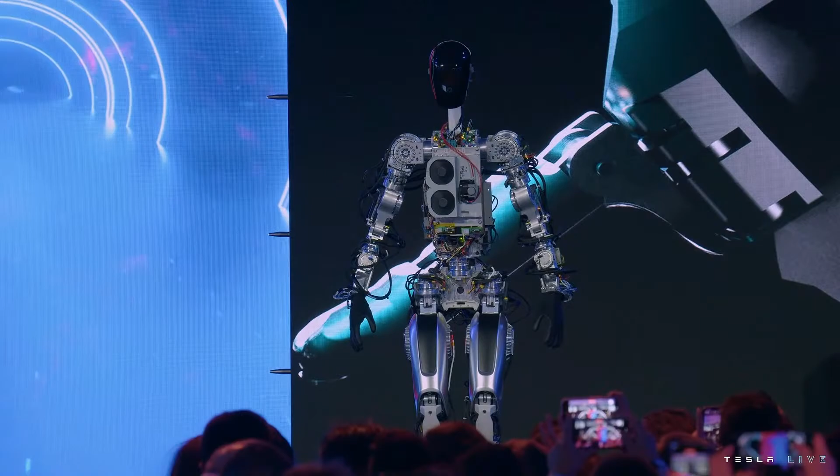So this is essentially the same full self-driving computer that runs in your Tesla cars, by the way. This is literally the first time the robot has operated without a tether. It was on stage tonight.

So the robot can actually do a lot more than we just showed you. We just didn't want it to fall on its face. So we'll show you some videos now of the robot doing a bunch of other things, which are less risky. We should close the screen, guys.

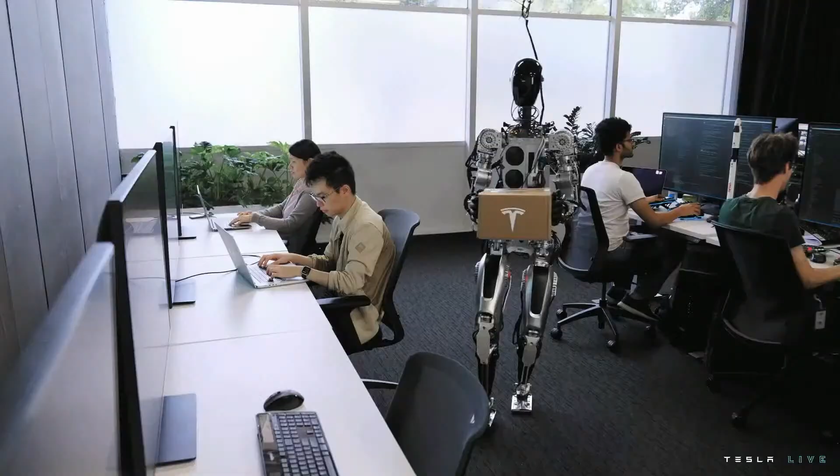Yeah, we wanted to show a little bit more what we've done over the past few months with the bot, just walking around and dancing on stage. Just humble beginnings, but you can see the autopilot neural networks running as is, just retrained for the bot, directly on that new platform. That's my watering can.

Yeah, when you see a rendered view, that's the robot. That's the world the robot sees. So it's very clearly identifying objects. Like this is the object it should be picking it up.

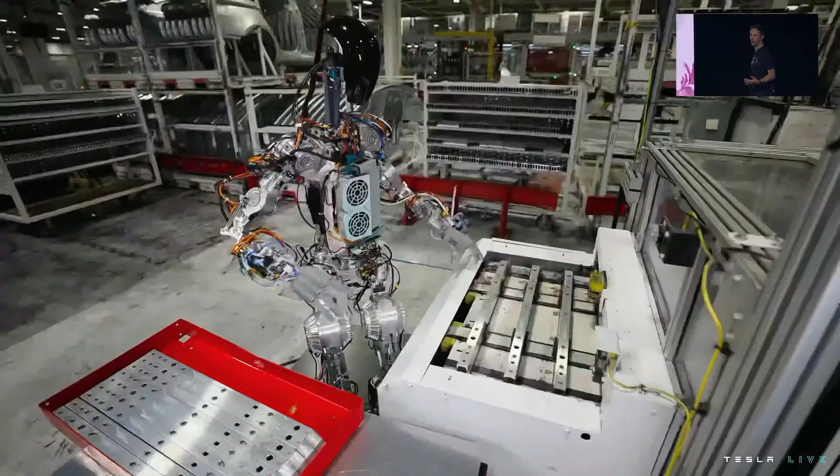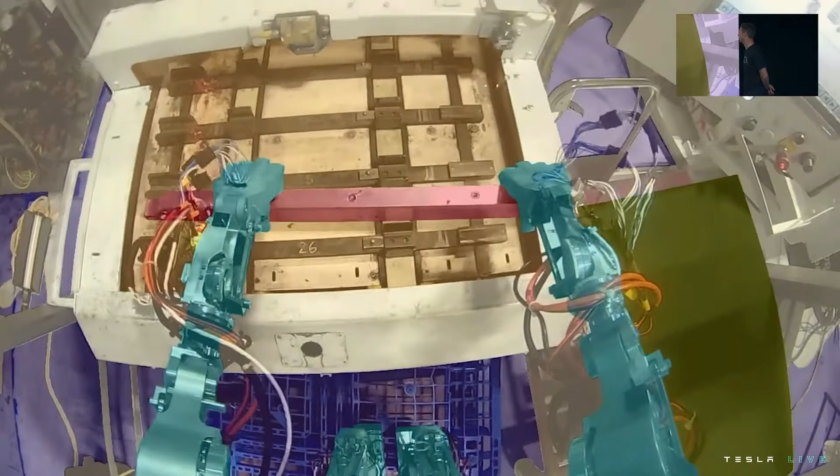We use the same process as we did for Autopilot to collect data and train neural networks that we then deploy on the robot. That's an example that illustrates the upper body a little bit more. And something that we'll try to nail down to perfection over the next few months. This is really an actual station in the Fremont factory that it's working at.

And that's not the only thing we have to show today, right? Yeah, absolutely. So what you saw was what we call Bumble C, that's our sort of rough development robot using semi-off-the-shelf actuators. But we actually have gone a step further than that already. The team's done an incredible job, and we actually have an Optimus bot with fully Tesla-designed and built actuators, battery pack, control system, everything.

It wasn't quite ready to walk, but I think it will walk in a few weeks. But we wanted to show you the robot, something that's actually fairly close to what will go into production, and show you all the things it can do. So let's bring it out. Do it.

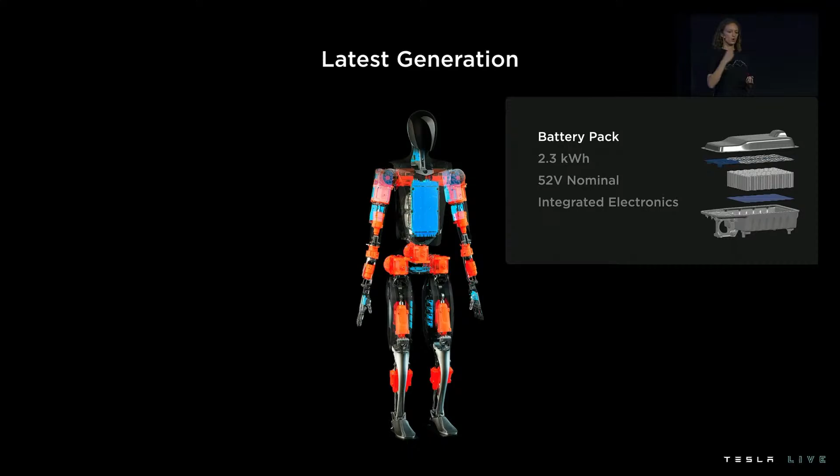This is sized at 2.3 kilowatt hours, perfect for about a full day's worth of work. What's really unique about this battery pack is it has all of the battery electronics integrated into a single PCB within the pack, so everything from sensing to fusing, charge management, and power distribution is all in one place. We're leveraging both our vehicle products and energy products to roll key features into this battery - streamlined manufacturing, efficient cooling, battery management, and safety. And of course, we can leverage Tesla's existing infrastructure and supply chain to make it.

Going on to sort of our brain, it's not in the head, but it's pretty close - also in our torso, we have our central computer. As you know, Tesla already ships full self-driving computers in every vehicle we produce. We want to leverage both the autopilot hardware and software for the humanoid platform, but because it's different in requirements and form factor, we're going to change a few things first.

It's going to do everything a human brain does - processing vision data, making split-second decisions based on multiple sensory inputs, and also communications. To support communications, it's equipped with wireless connectivity as well as audio support. It also has hardware-level security features, which are important to protect both the robot and the people around it.

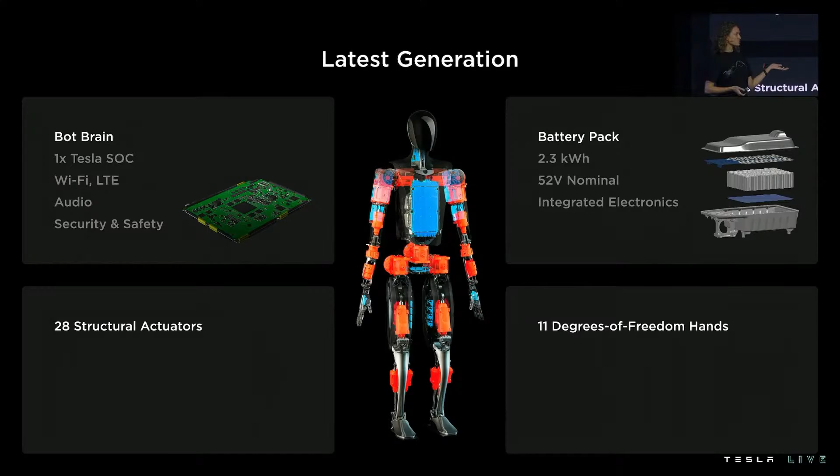Now that we have our core, we're going to need some limbs on this guy. We'd love to show you a little bit about our actuators and our fully functional hands as well. But before we do that, I'd like to introduce Malcolm, who's going to speak a little bit about our structural foundation for the robot.

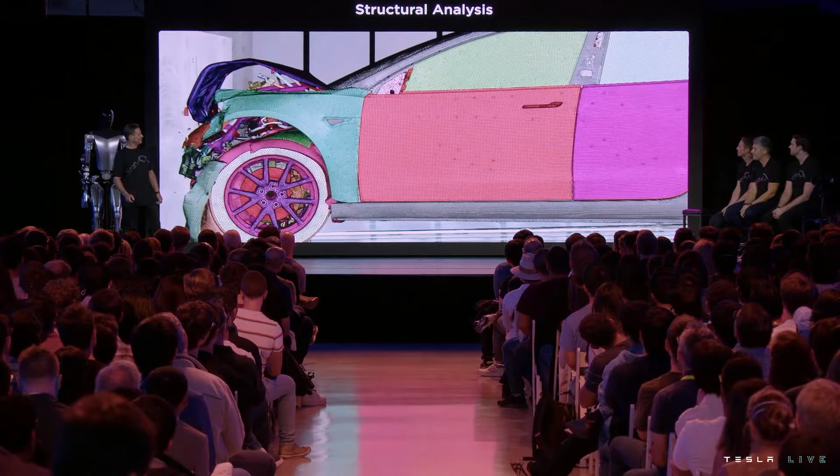Tesla have the capabilities to analyze highly complex systems. They don't get much more complex than a crash. You can see here a simulated crash from Model 3 superimposed on top of the actual physical crash - it's actually incredible how accurate it is. Just to give you an idea of the complexity, this model includes every nut, bolt, washer, and spot weld, and it has 35 million degrees of freedom. It's quite amazing, and it's true to say that if we didn't have models like this, we wouldn't be able to make the safest cars in the world.

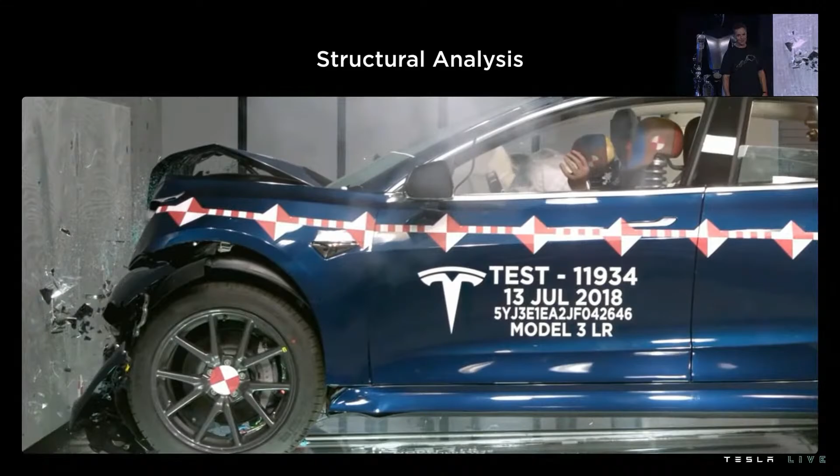So can we utilize our capabilities and our methods from the automotive side to influence a robot?

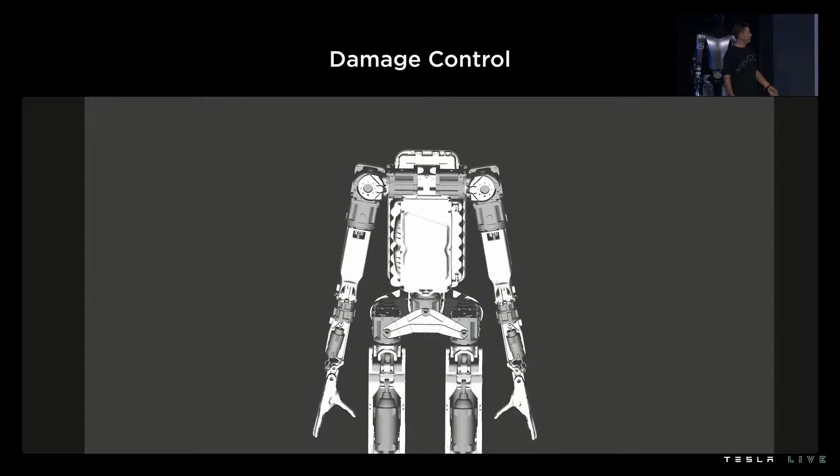Well, we can make a model, and since we had crash software, we're using the same software here, we can make it fall down. The purpose of this is to make sure that if it falls down - ideally it doesn't - but it's superficial damage. We don't want it to, for example, break its gearbox and its arms - that's the equivalent of a dislocated shoulder of a robot, difficult and expensive to fix. So we wanted it to dust itself off and get on with the job it's been given.

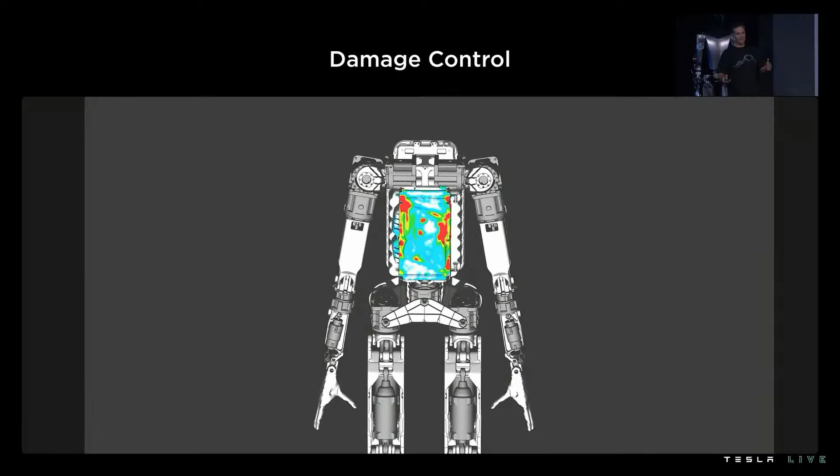We can also take the same model and drive the actuators using inputs from a previously solved model, bringing it to life. This produces the motions for the tasks we want the robot to do - picking up boxes, turning, squatting, walking upstairs. Whatever the set of tasks are, we can play to the model. This is showing just simple walking. We can create the stresses in all the components, which helps us to optimize the components.

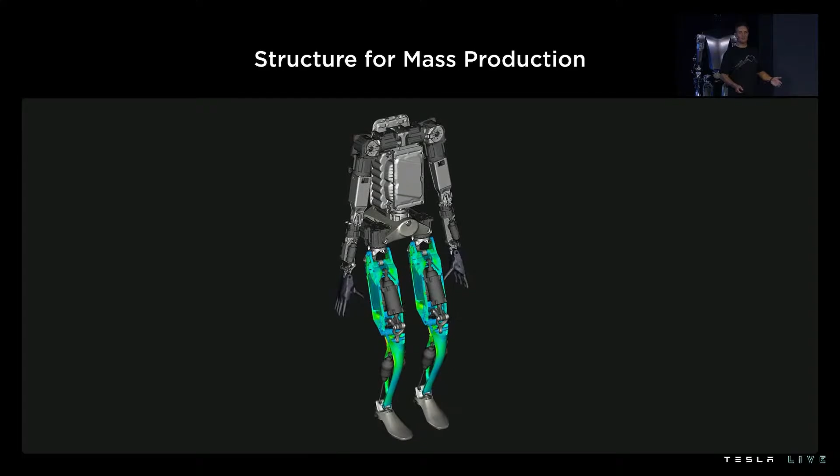These are not dancing robots. These are actually the modal behavior, the first 5 modes of the robot. Typically, when people make robots, they make sure the first mode is up around the top single figures, up towards 10 hertz. The reason to do this is to make the controls of walking easier.

It's very difficult to walk if you can't guarantee where your foot is wobbling around. That's okay if you make one robot, but we want to make thousands, maybe millions. We haven't got the luxury of making them from carbon fiber and titanium. We want to make them from plastic. Things are not quite so stiff, so we can't have these high targets. I call them dumb targets. We've got to make them work at lower targets.

So is that going to work? Well, if you think about it, sorry about this, but we're just bags of soggy jelly and bones thrown in. We're not high frequency. If I stand on my leg, I don't vibrate at 10 hertz. People operate at low frequency, so we know the robot actually can. It just makes controls harder. So we take the information from this, the modal data and the stiffness, and feed that into the control system. That allows it to walk.

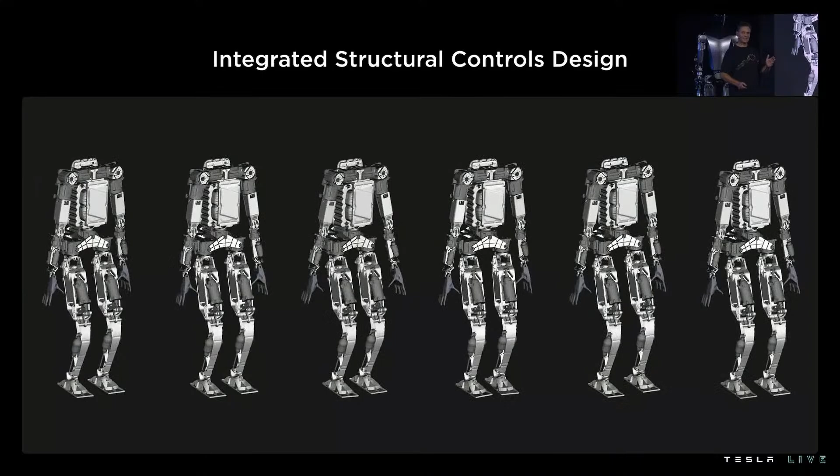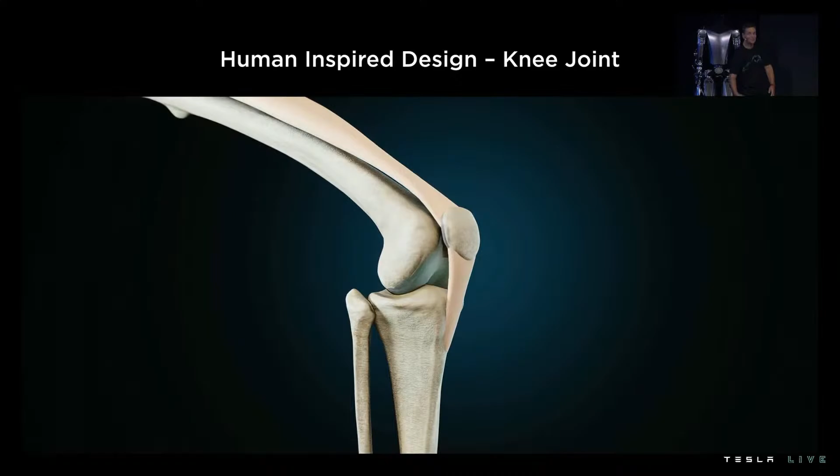Just changing tack slightly, looking at the knee. We can take some inspiration from biology, and we can look to see what the mechanical advantage of the knee is. It turns out it actually represents quite similar to a 4-bar link, and that's quite non-linear. That's not surprising, really, because if you think when you bend your leg down, the torque on your knee is much more when it's bent than it is when it's straight. So you'd expect a non-linear function. And in fact, the biology is non-linear. This matches it quite accurately.

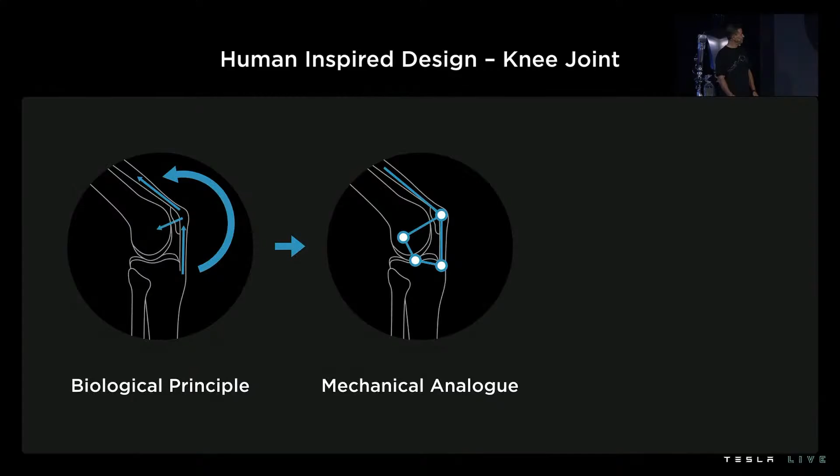So that's a representation. The 4-bar link is obviously not physically a 4-bar link. As I said, the characteristics are similar. But me bending down, that's not very scientific. Let's be a bit more scientific.

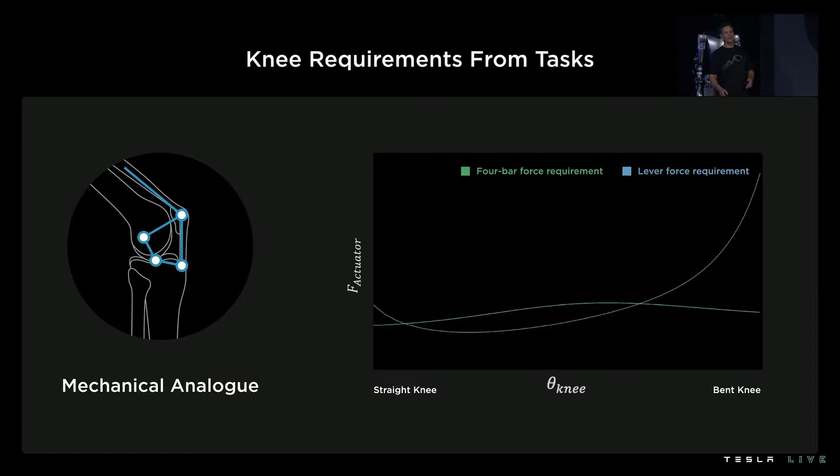So if we look at the 4-bar link, that's actually the green curve. And it's saying that the non-linearity of the 4-bar link has actually linearized the characteristic of the force. What that really says is that's lowered the force. That's what makes the actuator have the lowest possible force, which is the most efficient. We want to burn energy up slowly. What's the blue curve? Well, the blue curve is actually, if we didn't have a 4-bar link, we just had an arm sticking out of my leg here with an actuator on it, a simple 2-bar link. That's the best we could do with a simple 2-bar link. And it shows that that would create much more force in the actuator, which would not be efficient.

So what does that look like in practice? Well, as you'll see, it's very tightly packaged in the knee. You'll see it go transparent in a second. You'll see the 4-bar link there. It's operating on the actuator. This is determining the force and the displacements on the actuator.

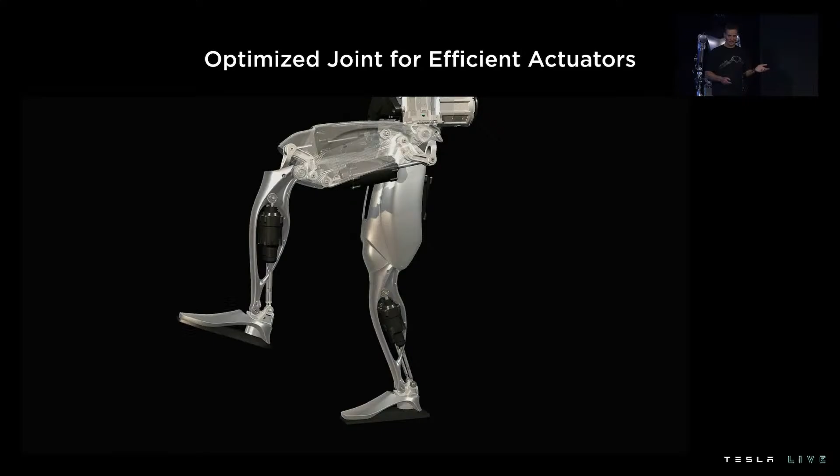I'll now pass you over to Konstantinos, who'll tell you a lot more detail about how these actuators are made and designed and optimized. Thank you. Thank you, Malcolm.

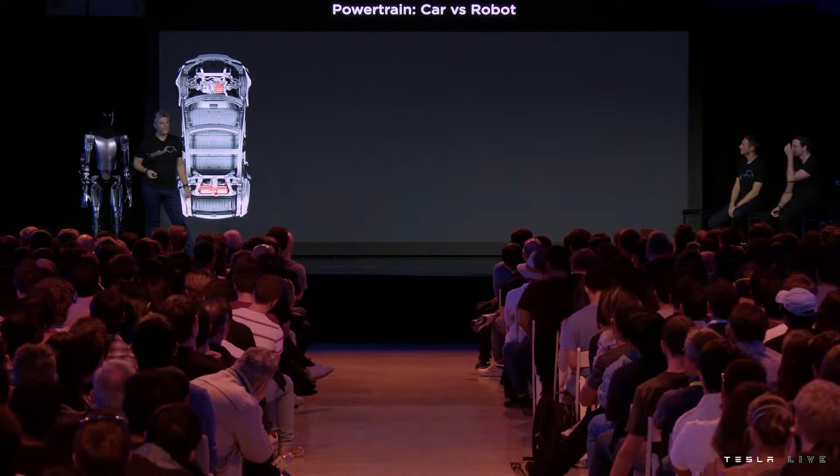So I would like to talk to you about the design process and the actuator portfolio in our robot. There are many similarities between a car and a robot when it comes to powertrain design. The most important thing that matters here is energy, mass, and cost. We are carrying over most of our design experience from the car to the robot.

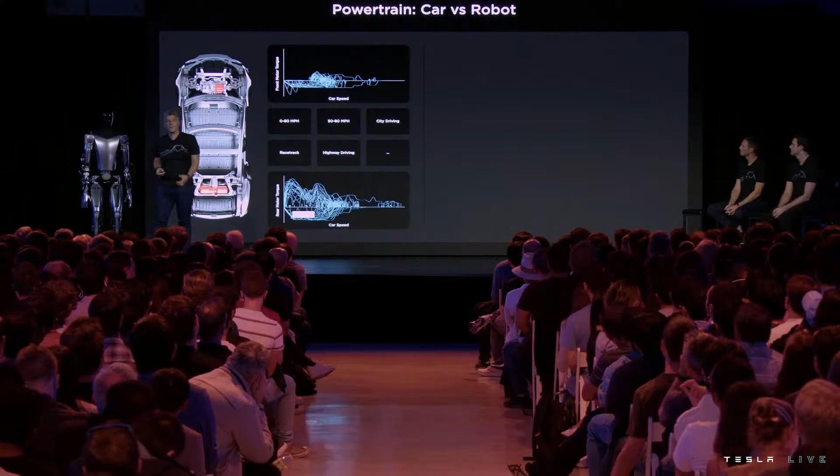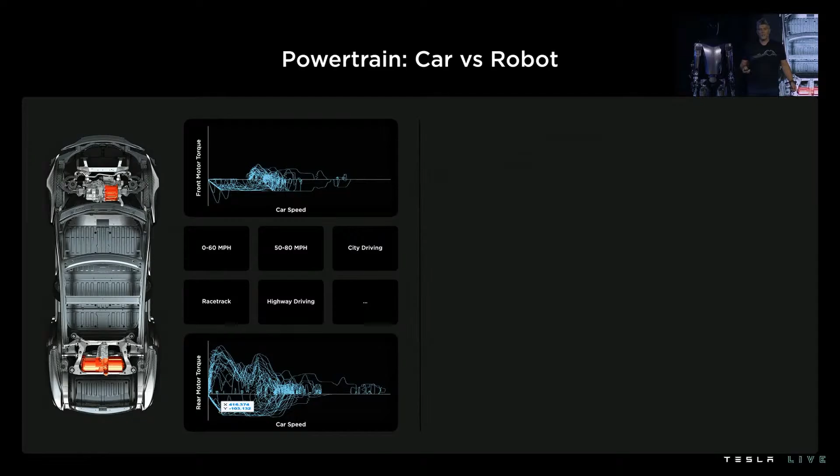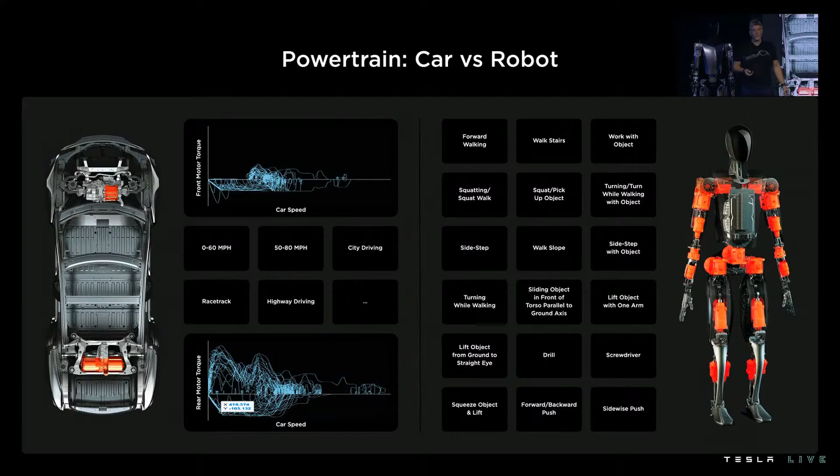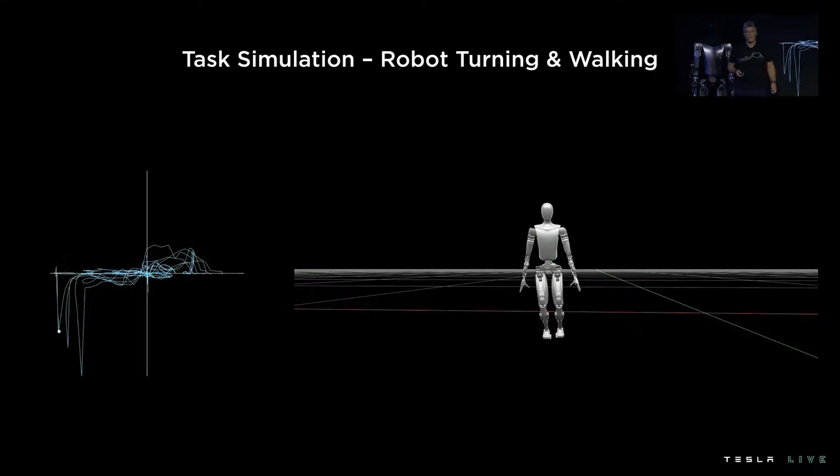So in this particular case, you see a car with 2 drive units, used to accelerate the car in a 0 to 60 miles per hour time, or drive a city drive cycle. While the robot has 28 actuators, it's not obvious what the tasks are at actuator level. So we have higher level tasks, like walking or climbing stairs or carrying a heavy object, which need to be translated into joint specs. Therefore, we use our model that generates the torque speed trajectories for our joints, which subsequently is fed into our optimization model to run through the optimization process.

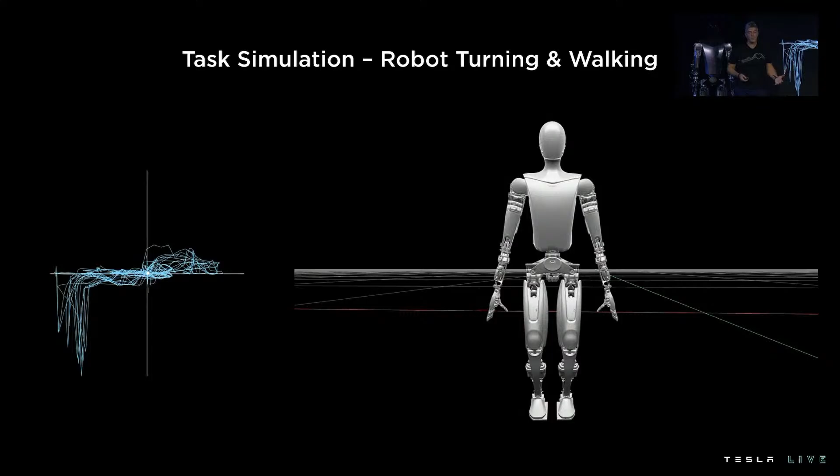This is one of the scenarios that the robot is capable of doing, which is turning and walking.

When we have this torque speed trajectory, we lay it over an efficiency map of an actuator, and we are able, along the trajectory, to generate the power consumption and the cumulative energy for the task versus time.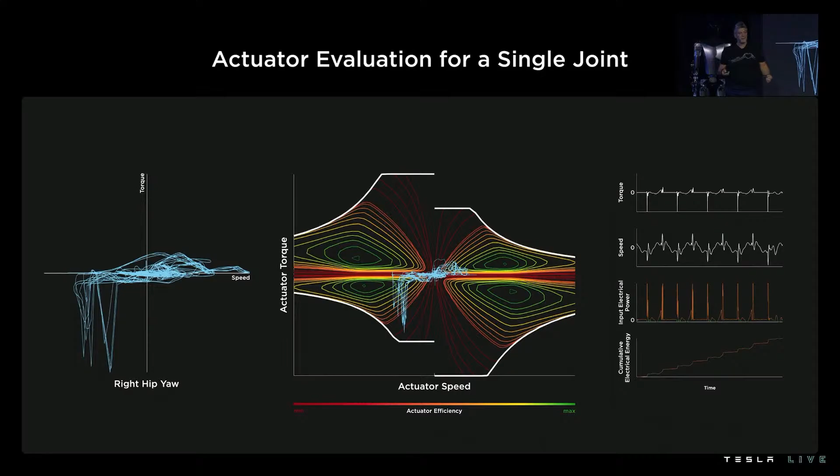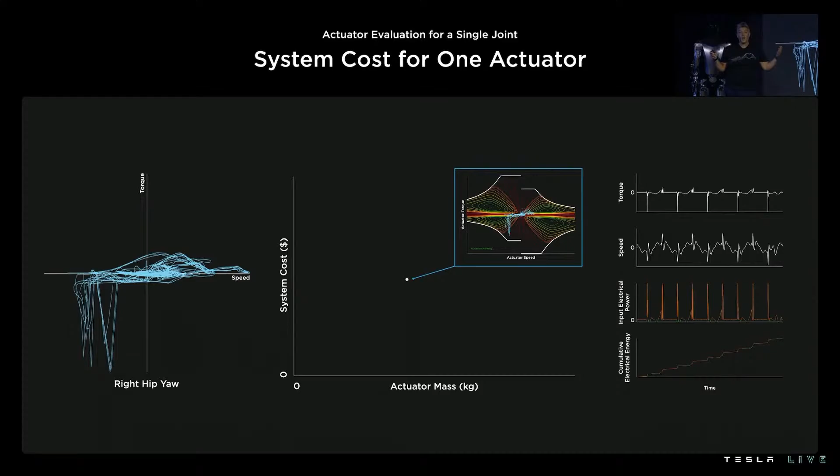This allows us to define the system cost for the particular actuator and put a simple point into the cloud. Then we do this for hundreds of thousands of actuators by solving in our cluster.

The red line denotes the Pareto front, which is the preferred area where we will look for our optimal. The X denotes the preferred actuator design we have picked for this particular joint.

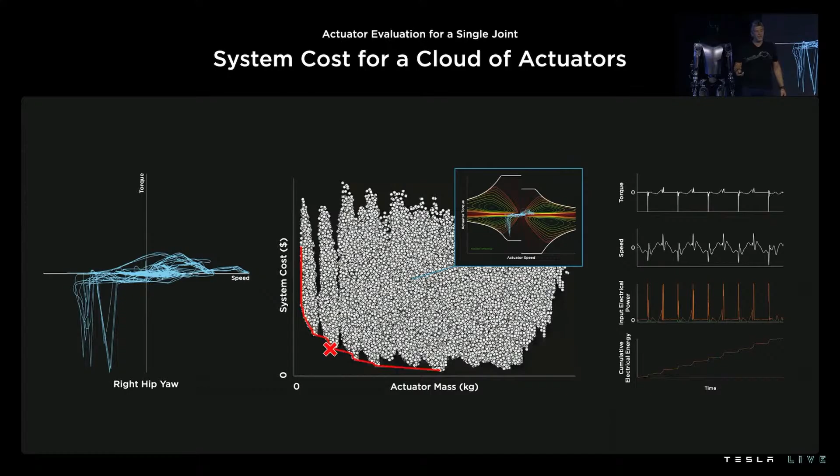Now we need to do this for every joint. We have 28 joints to optimize, and we parse our cloud again for every joint spec, and the red X this time denotes the bespoke actuator designs for every joint. The problem here is that we have too many unique actuator designs, and even if we take advantage of the symmetry, still there are too many.

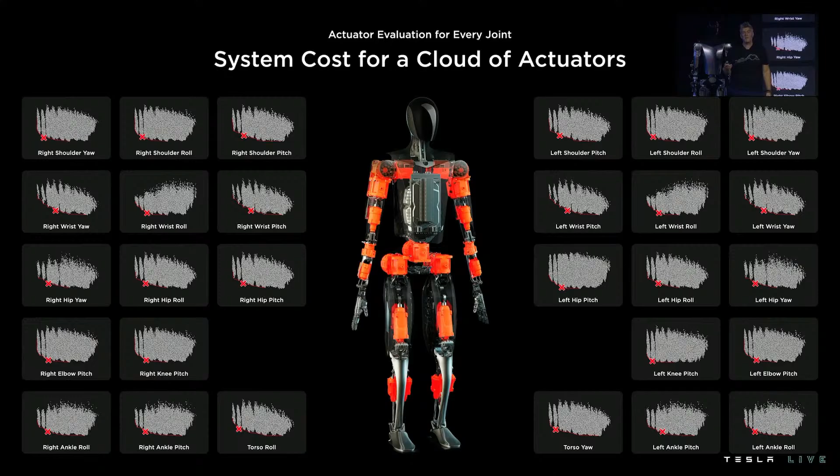In order to make something mass manufacturable, we need to be able to reduce the amount of unique actuator designs. Therefore, we run something called a commonality study, which parses our cloud again, looking this time for actuators that simultaneously meet the joint performance requirements for more than one joint at the same time.

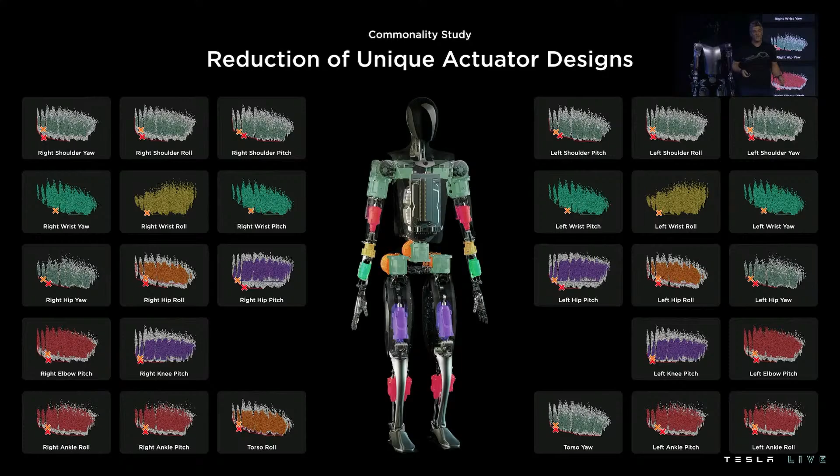The resulting portfolio is 6 actuators, shown in a color map at the middle figure. The actuators can also be viewed in this slide. We have 3 rotary and 3 linear actuators, all of which have a great output force or torque per mass.

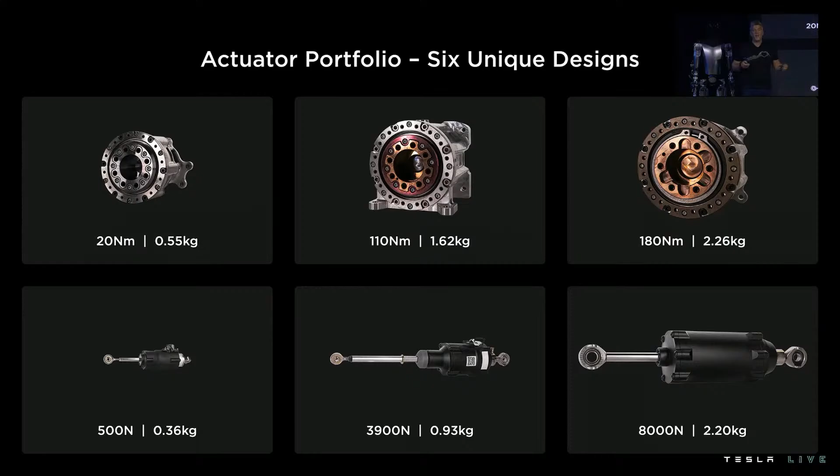The rotary actuator in particular has a mechanical clutch integrated on the high-speed side, an angular contact ball bearing on the high-speed side, and on the low-speed side a cross-roller bearing, and the gear train is a strain-wave gear. There are 3 integrated sensors here and a bespoke permanent magnet machine.

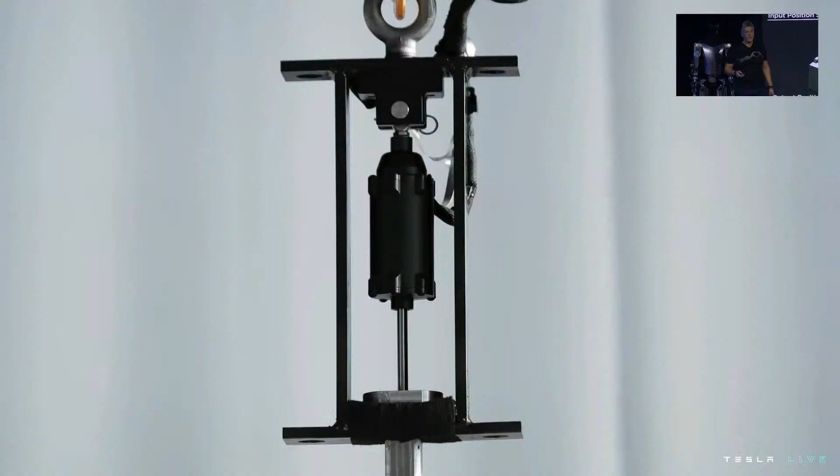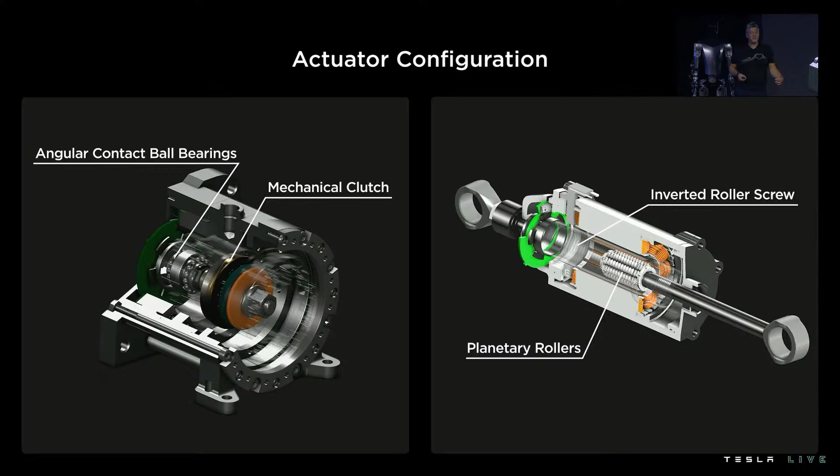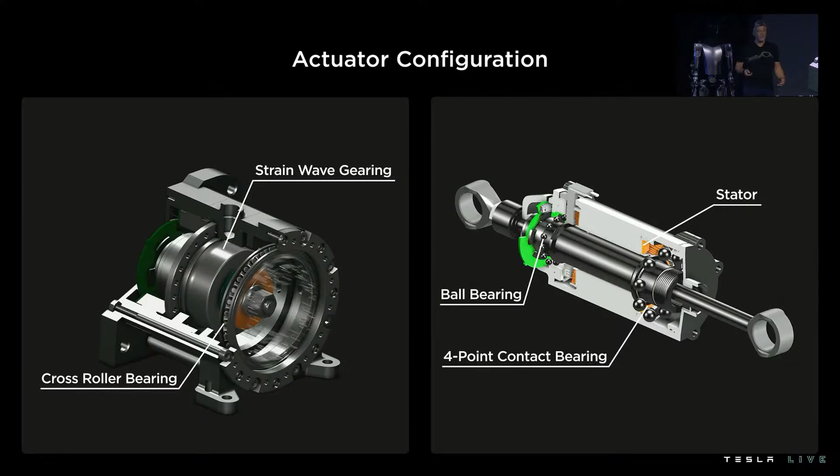The linear actuator has planetary rollers and an inverted roller screw as a gear train, which allows efficiency, compaction, and durability. In order to demonstrate the force capability of our linear actuators, we have set up an experiment to test it under its limits.

And I will let you enjoy the video.

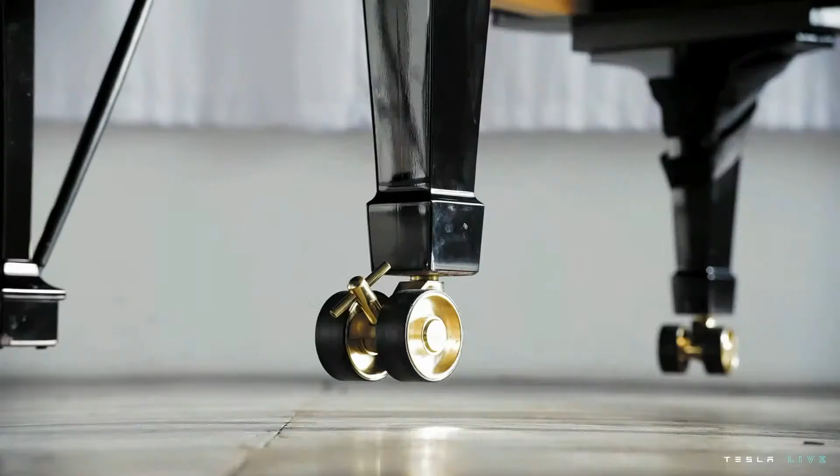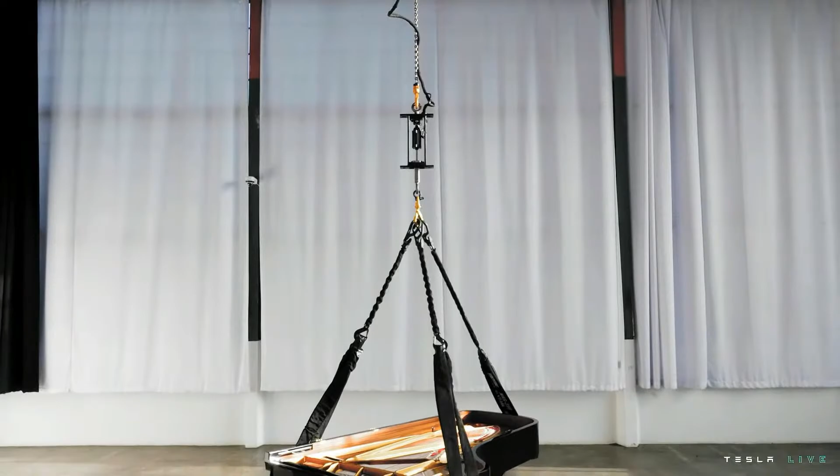Our actuator is able to lift a half-ton, 9-foot concert grand piano.

And this is a requirement. It's not something nice to have, because our muscles can do the same when they are direct driven. When directly driven, our quadricep muscles can do the same thing. It's just that the knee is an up-gearing linkage system that converts the force into velocity at the end effector of our heels, for purposes of giving the human body agility.

So this is one of the main things that are amazing about the human body. And I'm concluding my part at this point, and I would like to welcome my colleague, Mike, who's going to talk to you about hand design. Thank you very much.

Thanks, Konstantinos.

So we just saw how powerful a human and a humanoid actuator can be. However, humans are also incredibly dexterous. The human hand has the ability to move at 300 degrees per second. It has tens of thousands of tactile sensors, and it has the ability to grasp and manipulate almost every object in our daily lives.

For our robotic hand design, we were inspired by biology. We have 5 fingers and an opposable thumb. Our fingers are driven by metallic tendons that are both flexible and strong. We have the ability to complete wide aperture power grasps while also being optimized for precision gripping of small, thin, and delicate objects. So why a human-like robotic hand?

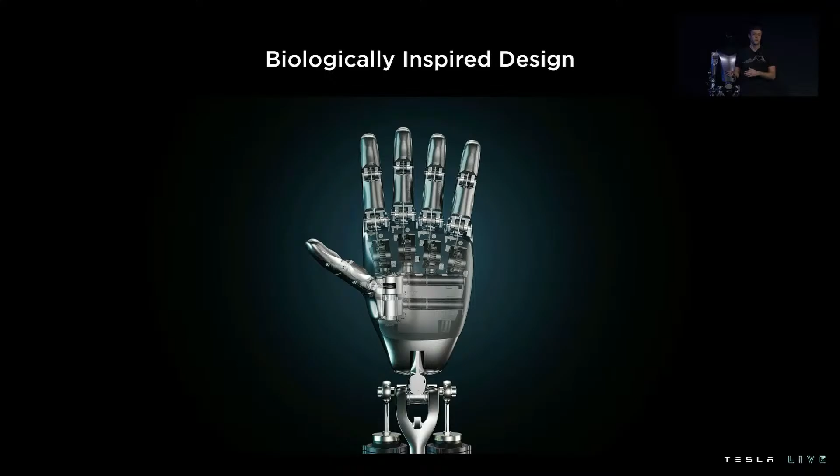Some basic stats about our hand is that it has 6 actuators and 11 degrees of freedom. It has an in-hand controller, which drives the fingers and receives sensor feedback. Sensor feedback is really important to learn a little bit more about the objects that we're grasping, and also for proprioception, which is the ability for us to recognize where our hand is in space.

One of the important aspects of our hand is that it's adaptive. This adaptability involves complex mechanisms that allow the hand to adapt to the objects being grasped. Another important part is that we have a non-back drivable finger drive. This clutching mechanism allows us to hold and transport objects without having to turn on the hand motors.

You just heard how we went about designing the TeslaBot hardware. Now I'll hand it off to Milan and our autonomy team to bring this robot to life.

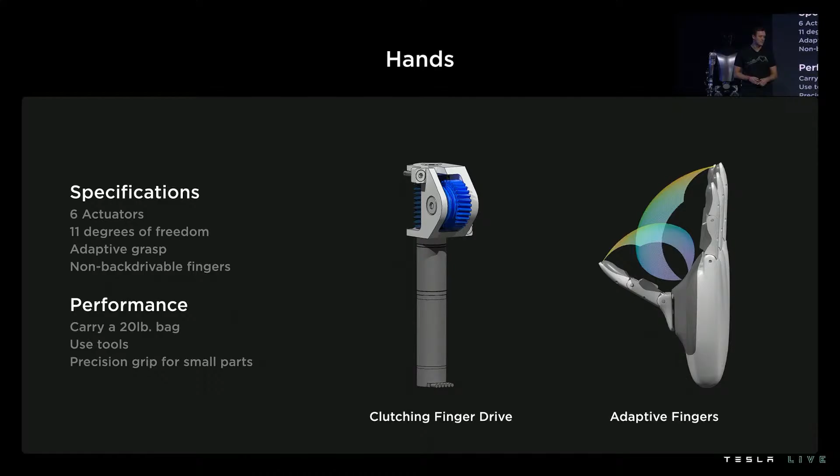All those cool things we've shown earlier in the video were possible in just a matter of months, thanks to the amazing work we've done on Autopilot over the past few years. Most of those components ported quite easily over to the bot's environment. We're just moving from a robot on wheels to a robot on legs, so some components are pretty similar, and others require more heavy lifting.

For example, our computer vision neural networks were ported directly from Autopilot to the bot. It's exactly the same occupancy network, now running on the bot here in this video, that we'll talk about in more detail later with the Autopilot team. The only thing that really changed was the training data, which we had to recollect.

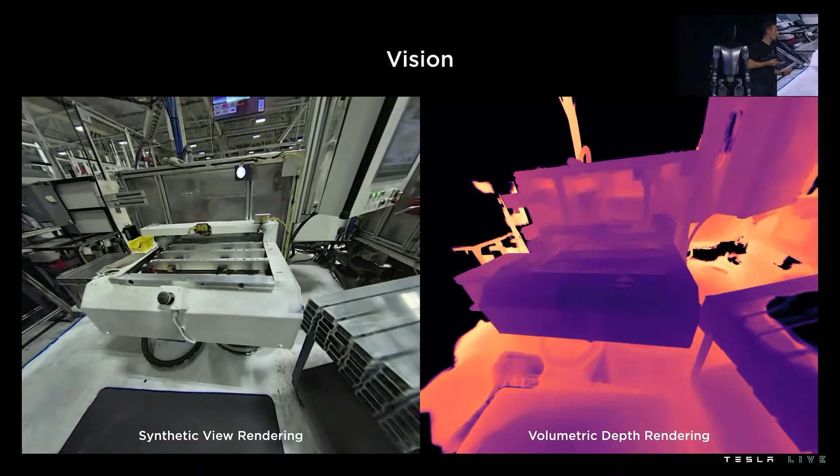We're also trying to find ways to improve those occupancy networks using work made on neural radiance fields, to get really great volumetric rendering of the bot's environment. For example, here, some machinery that the bot might have to interact with.

Another interesting problem is in indoor environments, mostly with absence of GPS signal, how do you get the bot to navigate to its destination? Say, for instance, to find its nearest charging station. So we've been training more neural networks to identify high-frequency features, key points within the bot's camera streams, and track them across frames over time as the bot navigates through its environment. We're using those points to get a better estimate of the bot's pose and trajectory within its environment as it's walking.

We also did quite some work on the simulation side. This is literally the Autopilot simulator, to which we've integrated the robot's locomotion code. This is a video of the motion control code running in the Autopilot simulator, showing the evolution of the robot's walk over time. As you can see, we started quite slowly in April and accelerated as we unlocked more joints and deployed more advanced techniques like arm balancing over the past few months.

Locomotion is specifically one component that's very different as we're moving from the car to the bot's environment. I think it warrants a bit more depth, so I'd like my colleagues to start talking about this now.

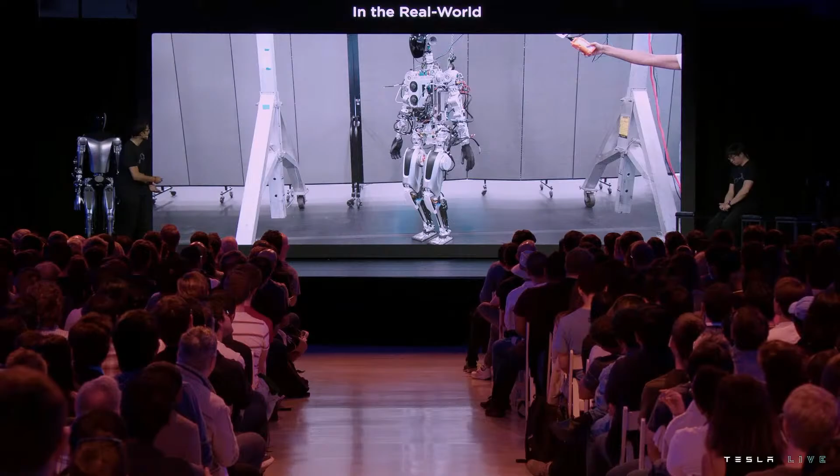So let's take the motion plan that Felix just talked about and put it in the real world on a real robot. Let's see what happens. It takes a couple steps and falls down. Well, that's a little disappointing. But we are missing a few key pieces here, which will make it walk.

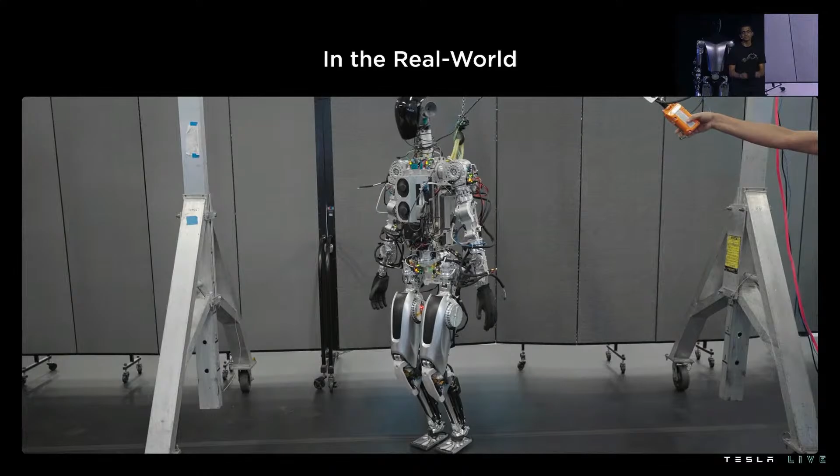Now, as Felix mentioned, the motion planner is using an idealized version of itself and a version of reality around it. This is not exactly correct. It also expresses its intention through trajectories and wrenches. Wrenches are forces and torques that it wants to exert on the world to locomote.

Reality is way more complex than any sim or model. Also, the robot is not simplified. It's got vibrations and modes, compliance, sensor noise, and on and on and on.

So what does that do to the real world when you put the bot in the real world? Well, the unexpected forces cause unmodeled dynamics, which essentially the planner doesn't know about, and that causes destabilization, especially for a system that is dynamically stable like biped locomotion.

So what can we do about it? Well, we measure reality. We use sensors and our understanding of the world to do state estimation. And here you can see the attitude and pelvis pose, which is essentially the vestibular system in a human, along with the center of mass trajectory being tracked when the robot's walking in the office environment.

Now we have all the pieces we need in order to close the loop. So we use our better bot model, we use the understanding of reality that we've gained through state estimation, and we compare what we want versus what we expect that reality is doing to us in order to add corrections to the behavior of the robot.

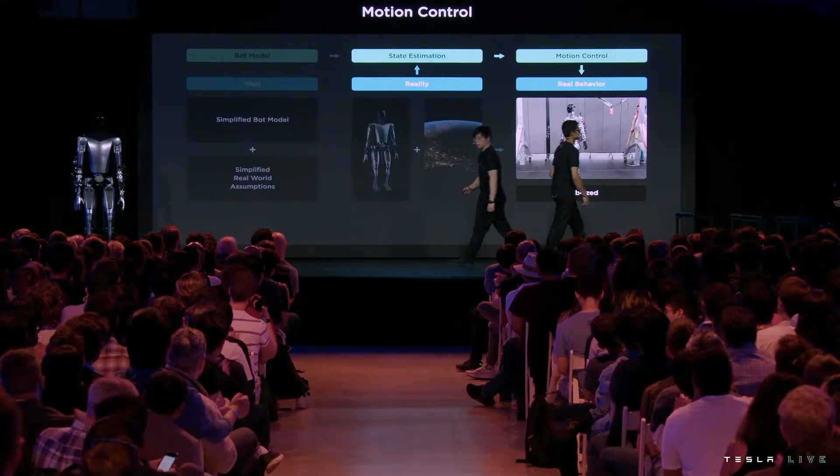Hi, everyone. My name is Eric, robotics engineer on TeslaBot, and I want to talk about how we've made the robot manipulate things in the real world. We wanted to manipulate objects while looking as natural as possible, and also get there quickly.

So what we've done is we've broken this process down into two steps. First is generating a library of natural motion references, or we could call them demonstrations, and then we've adapted these motion references online to the current real-world situation.

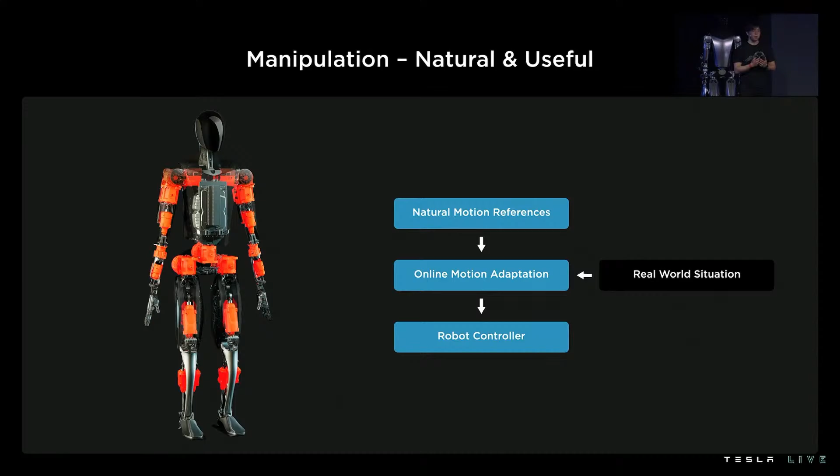But a single demonstration is not generalizable to the variation in the real world. For instance, this would only work for a box in a very particular location.

So what we've also done is run these reference trajectories through a trajectory optimization program, which solves for where the hand should be, how the robot should balance during when it needs to adapt the motion to the real world. So for instance, if the box is in this location, then our optimizer will create this trajectory instead.

Next, Milan's going to talk about what's next for the Optimus Tesla bot. Thanks. Thanks, Eric.

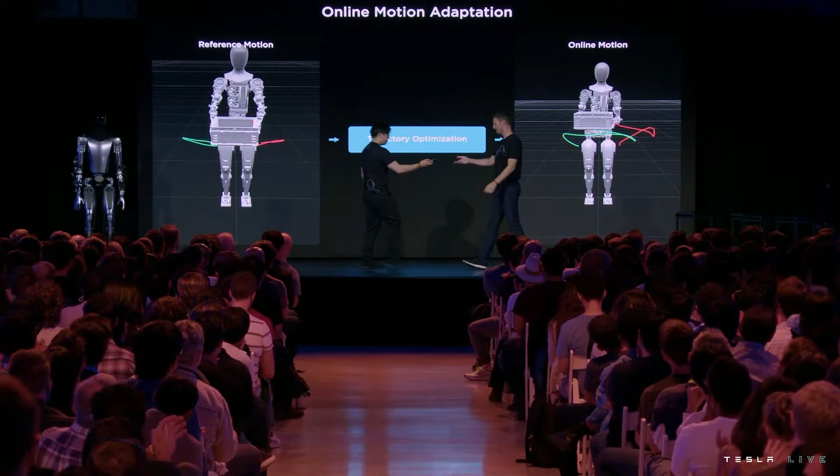Right, so hopefully by now you guys got a good idea of what we've been up to over the past few months. We started having something that's usable, but it's far from being useful. There's still a long and exciting road ahead of us. I think the first thing within the next few weeks is to get Optimus at least at par with Bumble C, the other bot prototype you saw earlier, and probably beyond.

We're also going to start focusing on the real use case at one of our factories, and really going to try to nail this down and iron out all the elements needed to deploy this product in the real world. I was mentioning earlier, indoor navigation, graceful fall management, or even servicing, all components needed to scale this product up.

But I don't know about you, but after seeing what we've shown tonight, I'm pretty sure we can get this done within the next few months or years and make this product a reality and change the entire economy.